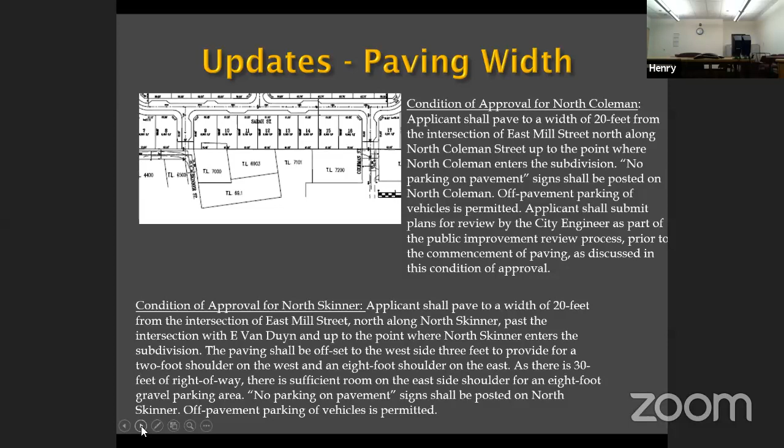I presented two draft conditions of approval addressing this situation that are up for council consideration. Next slide, please.

Bollards. Staff received this update on August 19th in regard to not utilizing North Skinner as a vehicular access point. Appellants have proposed to place bollards on North Skinner, effectively removing vehicular access into the subdivision via North Skinner.

In conversations with the applicant, they would not be opposed to this and would place breakaway bollards on North Skinner where it currently shows North Skinner entering the subdivision. These breakaway bollards can be quickly removed to allow for emergency vehicle access in the event they need to access the subdivision.

This access point would now be only open to bicycle and pedestrians. In this case, the 20-foot paving on North Skinner and North Coleman do not change. They would still be widened to 20 feet, parking on pavement prohibited, but off-pavement parking permitted.

The addition of bollards to North Skinner and moving vehicular traffic onto Coleman will not result in operational or safety issues beyond what is standard for this type of street and intersection, as found in the applicant's supplemental TIA dated August 20th, 2020. If council chooses this option, I have provided a draft condition for consideration. I'd also like to note the fire chief has signed off on this particular situation here. They are fine with the bollards.

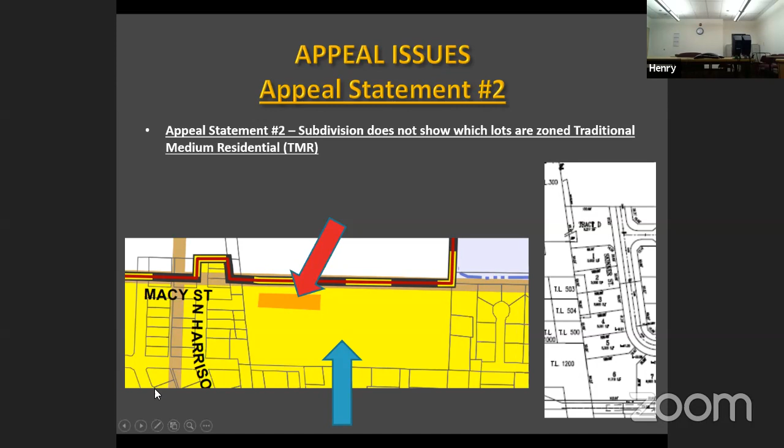Next slide, please, Sammy. Prior to final plat approval, the final plat shall have a plat note indicating which lots are zoned traditional medium residential. Next slide, Sammy.

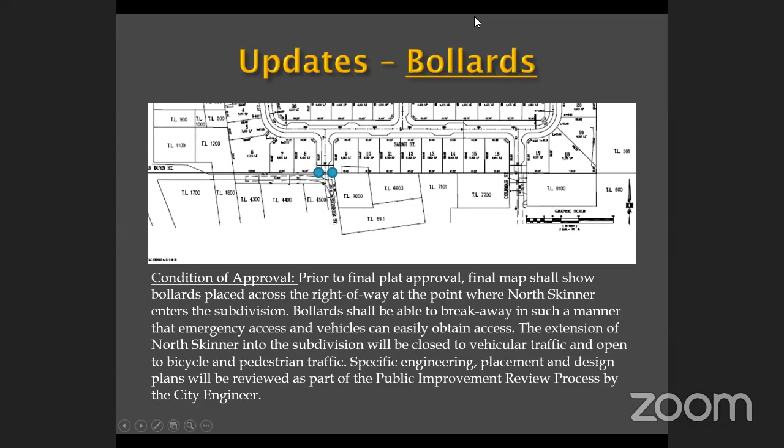Yeah, my limited knowledge - it's like a peg that would be placed in the middle of a bike path, and it would prevent a car from getting on there, but you could easily walk by it or ride your bike by it. If needed in an emergency situation, they could quickly be removed by the fire department. Maybe think of the Eugene Bike Path - there's construction, like little metal posts at the end. Those are bollards to prevent cars from driving on there.

Got it, they're basically steel posts for protection. That's what I was looking for. Bollards also protect things like gas meters. They're commonly used for protecting an area or creating an open barrier.

Councilor Fox: Based on Councilor McConnell's question about only one point of access, I thought East Mackenzie was connecting it. Is that not the case? I'm not aware of any vehicle access via East Mackenzie leading into the subdivision.

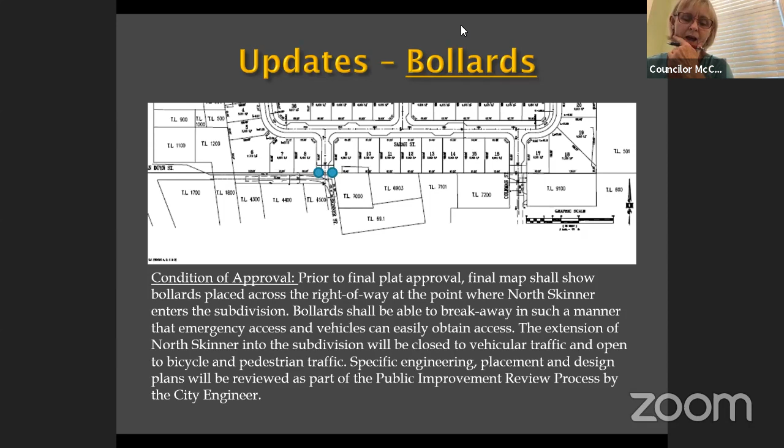Councilor McConnell: I have one more question. The improvement to Van Duyn, what is the purpose of that, given that Van Duyn ends in a property that has been vacated? Can Sammy go to slide 8?

The dedication of Van Duyn has been worked out behind the scenes between the applicant and opponents. It also addresses a requirement for improving land adjacent to the subdivision, which isn't the case for all adjacent streets. But the applicant does own land adjacent to East Van Dyne, so it has the possibility of being improved up to 45 feet of right of way.

But it would not go through to a connector of any sort. That's correct—the improvement of East Van Dyne would still terminate at Skinner and would not go all the way through to the other side of West Van Duyn because there's private property in the way.

Other questions? Councilor Fox: What is the logic for closing off the Mackenzie access, not Mackenzie, for the Skinner access? To limit vehicle traffic on North Skinner and also allow for pedestrian and bike access.

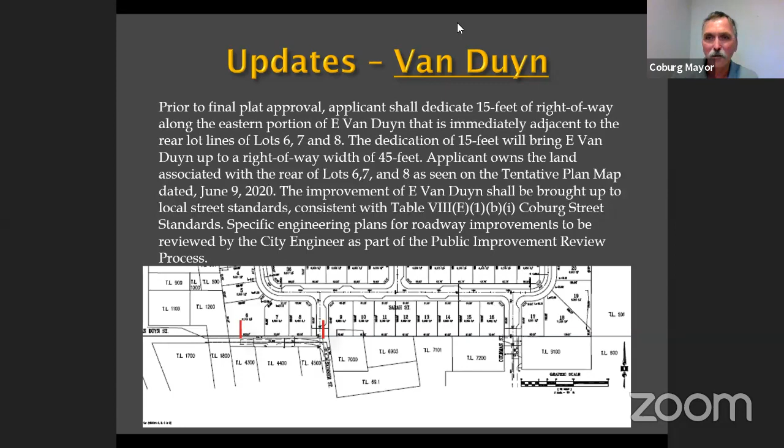Councilor McConnell: Mine isn't a question, but a clarification—one of the concerns from the appellants is traffic coming into the park area from Skinner onto Locust. I think that may be why they addressed that, though I may be wrong. We'll probably gain more clarity as we go with the other testimony.

Any other clarification questions? Councilor Fox, one more: North Coleman—was there any traffic pattern analysis about the amount of traffic that would come and go if there's only one point of access?

Yes, staff asked the applicant this morning to have their traffic engineer submit an amended TIA, and they did. The conclusion of the traffic engineer is that all access going to North Coleman is still efficient and safe and can operate as it's supposed to.

I sent that to Sammy this afternoon—Sammy, you might want to forward it if you haven't already. That was forwarded in their 8:20 packet, and I confirmed both Patty McConnell's written testimonies are included in that email as well, along with the PDF written testimony. I believe the applicant's traffic engineer is on tonight and may be available to answer more specific questions during their presentation.

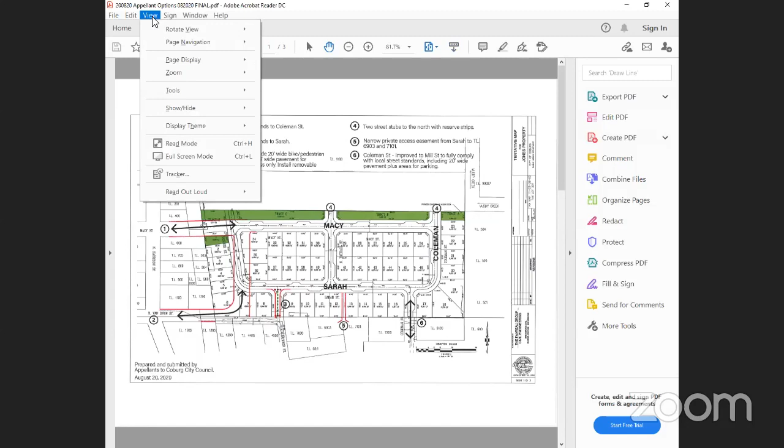Option A, again, this isn't completely vetted. I just want to touch on what we were trying to illustrate. So with option A, Macy Street extends to Coleman. That's in your adopted transportation plan. That occurs before the subdivision is constructed.

Van Duyn extends to Sarah, and we've realigned it in this option so that North Skinner is narrowed. It's not a fully improved public street. It is a bike and pedestrian and emergency access only. With regard to number 4, the number of street stubs going to land outside the urban growth boundary and outside the city limits is 2.

And to account for Van Duyn not going through and the hardship it creates for what are parcels that could achieve greater development, number 5 points to a private access easement. And then for Coleman, the improvements to Mill Street are to fully comply with local street standards, including not only the 20-foot wide pavement, but also areas for parking. So now that's the key themes with this option.

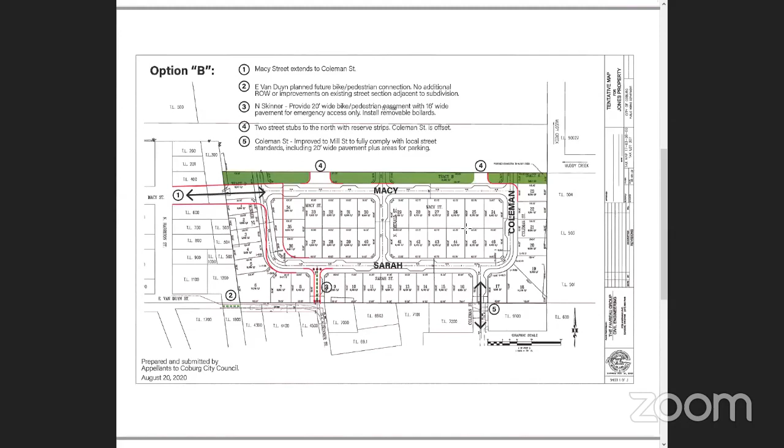Then with option C, this one probably comes the closest to code compliance. The developer is only responsible to extend Macy Street within the boundary of the subdivision, as shown there. East Van Duyn, again, the developer is only responsible adjacent to the tract itself, but that road is widened and fully improved to local street standards, just for lots 6, 7, and 8. Number 3 is the same.

Skinner's is narrowed. It does not have the right-of-way width to be able to be brought up to local street standards. Number 5 we've talked about. Number 6 is where the north-south street is aligned better so that as it goes forward, if the city decides to expand the urban growth boundary in this area, you don't create another triangular situation as it goes north. You have a good distance from North Harrison. And then with this one, Coleman is improved to full street standards.

We've included multiple times the local street standards. It's exhibit D in our latest packet to you. It has the parking area on the local street actually being paved. There's no signage, so as a driver, as a motorist, you'd know that you park wherever there's pavement, and then you have a soft shoulder and a travel lane.

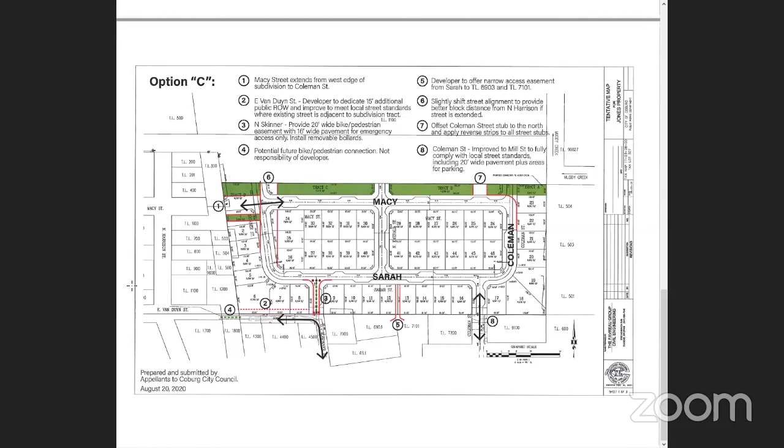8 minutes. Okay, I will say in general, there were a lot of missteps with how this application was reviewed when it came in, and it's unfortunate where we are today. We tried to illustrate alternatives. We're not against housing. We support residential development in the city of Coburg. It's the timing and the access and circulation being provided that are the biggest issues.

Since I have just a couple more minutes, I'll also share that this is the first subdivision to come in under your new code, and it's important that you actually look at the code section and realize you're setting a precedent for future subdividers. If a relatively flat 10-acre site, if a developer can simply state they don't have any land available for parks and recreation, you're allowing them to opt out by paying the fee.

And the fee may sound like a lot until you realize you don't have control over when and how much the lots sell for. Also, in this case, almost all of the tracts that are being deeded to the city will be used for stormwater drainage. So they're really not achieving that end goal.

Well, I will conclude with one more comment, and that is the subdivision did include street profiles for street improvements done within the subdivision. We have not received any street sections for Coleman, the existing street improvements being proposed. So that's just been challenging.

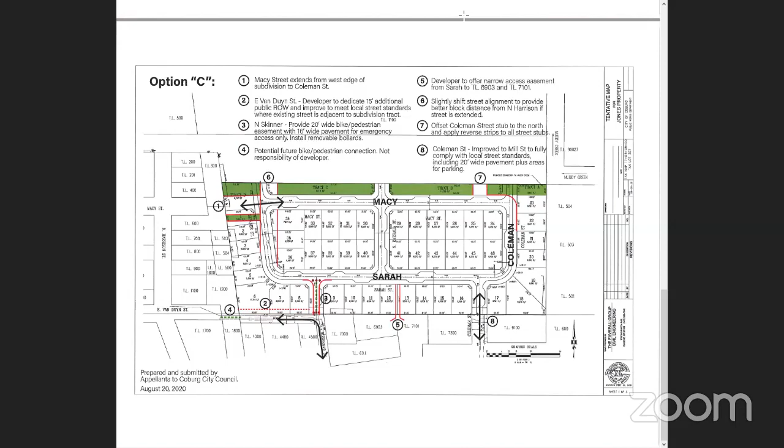That will conclude my comments, and I would like to see if Alan Wells could use our remaining time. And thank you for your consideration.

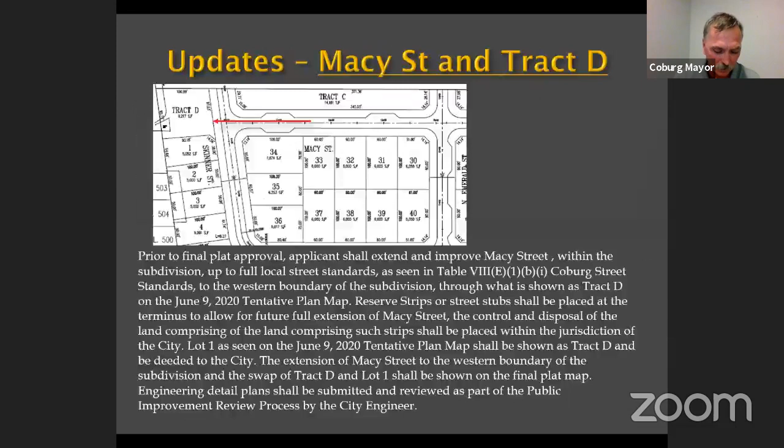Keep in mind, for clarification, that you can only ask clarifying questions, but we do have the applicant's rebuttal next, and they could. They're provided 10 minutes.

Mayor, it's Marcus. Go ahead, Councilor Alexander. Van Duyn, what is that access right there? I know there's a fence right there. Is that someone's property? Yes, between Skinner and... okay.

Well, if you look at the applicant's lot 6, 7, and 8, there is, I guess, 20 feet wide of North Skinner that's already there. And then there's 2 pieces of private property between that piece of Van Duyn and the western portion of Van Duyn.

Any other questions from council before we move to the applicant's rebuttal? I have one more question. Go ahead, Councilor Alexander. North Harrison Street, can that wrap around the end of that block? No, it's outside of the urban growth boundary and city limits, and Lane County would come into play, and that's nothing we really want to get into at this time. Lane County would need to be involved, and to this point, they have not been involved in that discussion.

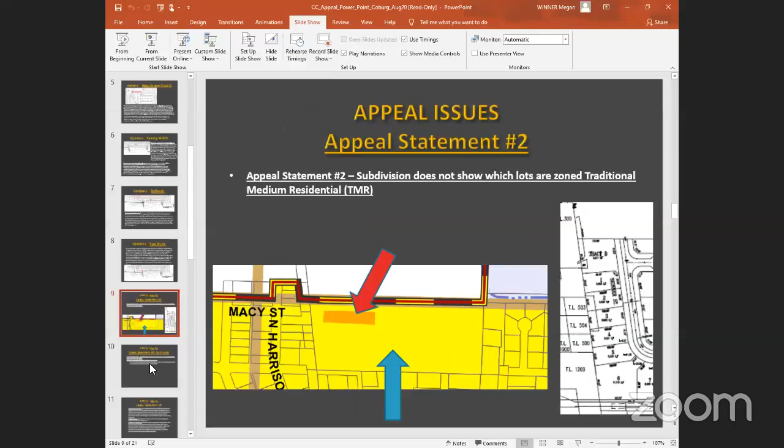It's in the red, near the bottom in the red, number 10. I can't see number 10. Can you move it up just a tad more, Sammy? Sammy, maybe highlight it, because red on black isn't the easiest to read. Yeah, that's okay, that's okay.

Subdivider shall, in addition to setting aside land, pay into a public land acquisition fund a sum of money equal to 1% of the gross sale price of each lot in the subdivision, which sum of money shall be paid at the time each lot is developed or sold, whichever occurs first. Okay, thank you, thank you.

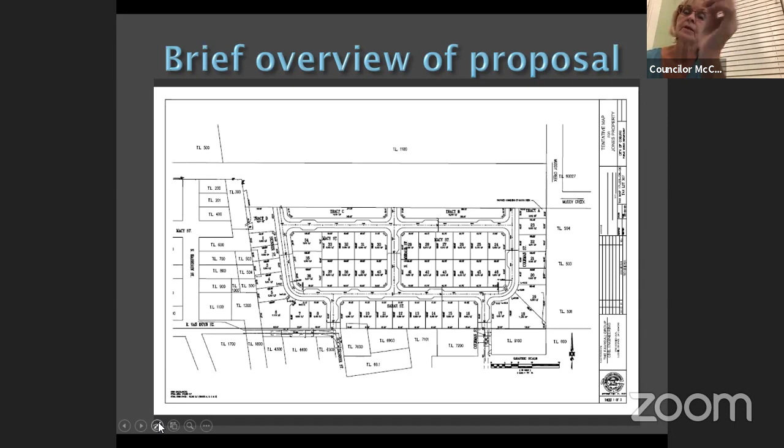I would suspect that we would have just a straight through on Macy Street. And with the potential dedication of 1 and 2 to parks, even if the Macy infringed upon 1, having half of 1 and all of 2 would still provide a substantial open space, I think, that could be used for a park. And would be centrally located for an existing neighborhood and the new neighborhood, it looks to me. But would be next to what would at some point become a very busy street. So there's that.

Any other questions? Yeah, Councilor Blaine. So if we do, say that Macy Street, we set it up that way, in the future we end up getting that access. That creates a real big problem for North Harrison, back into East Locust or Macy out to Willamette, basically. I know that's down the road, but that seems like we're just kind of moving the problem a couple streets away.

Just a thought. Well, this is Councilor Bell. In all honesty, from what I've heard and read and reread, I think that a lot of the appellant's concerns relate to not in my backyard, not wanting to see it, and I don't say that that's wrong. But I also know that as we've heard this, we heard as we were developing Hatfield, we heard a lot of concerns about how terrible it was going to be on the already failing intersection, what the impact was going to be on Water and Bruce. I think we heard it as we developed Coburg Crossing. I think there was tremendous concern about what that was going to do to those neighborhoods and those small streets. I don't know that that's come to fruition. And I think change is really hard, and I think we all acknowledge that, but it's how do we manage that?

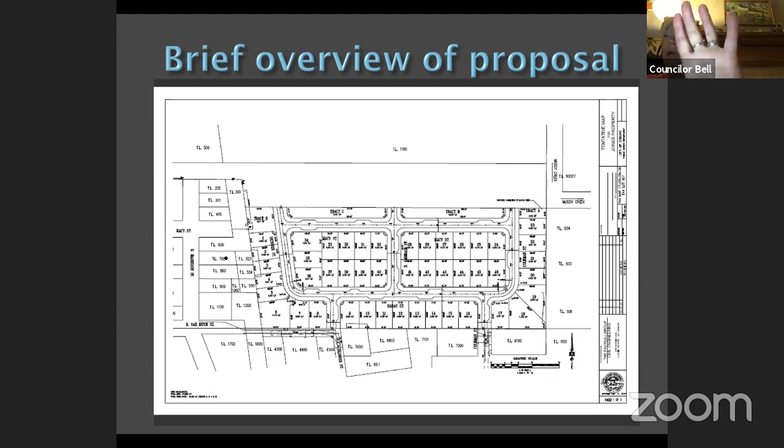I also wonder if there is a way that we could somehow, and I don't know this, but somehow loop this into our Coburg loop paths, because our loop path comes right off of Sarah. I mean, that's not that far, and I don't know what that would take. I think what we're struggling with is a lot of these streets and why they didn't punch through initially. This was all old railroad right of way.

And that's what we're struggling with at this point. Well, so I don't know. Okay, go ahead. There's further, because when you look at the planning, and I know Councilor McConnell's been on the planning commission too, but a lot of the stuff that we've put in where we want to continue the grid pattern and have these through streets, those are because of lessons learned before. That Van Duyn, where it's only 20 feet wide, is a classic. And I believe it was on Skinner Street that there was only a 20-foot right of way to the south that we had to correct in developments.

Yeah, and I believe, again, lessons learned, and we can't let that lesson go by on this one. I think we need to really push for maintaining that grid. It needs to be set up so that we show the future that, yes, that Van Duyn should be going through and Macy should be going through. To rely on the count of 6 access points in this neighborhood, with 3 of them being to the north, waiting for the UGB to expand and develop there, that's years down the road, up to 20 years or more, I believe. After we went through the UGB trying to get that area into our UGB and it was remanded back to us, I think we all have to accept those accesses to the north or egresses are a long ways down the road. I believe that setting up Van Duyn and Macy are real important, and we should be looking to set that infrastructure up. And at the appropriate time, which will never be the appropriate time, but at some hard moment, we're going to have to decide to take that private property and make those streets come through for the growth of our city.

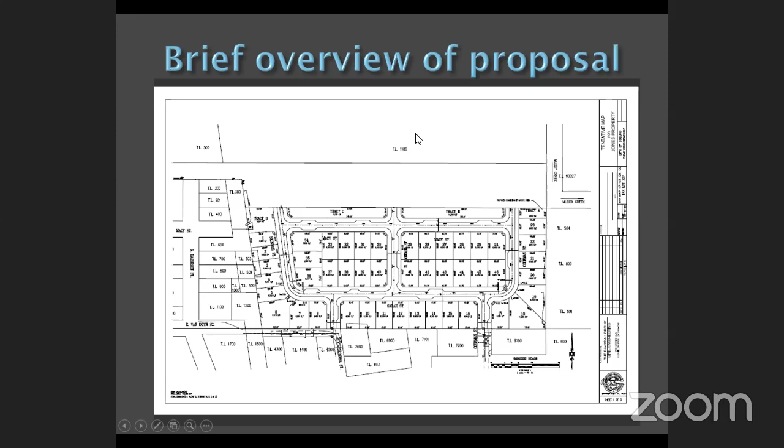And while we're pulling it up, I would agree with Councilor McConnell. Ultimately, the bollard addresses that, but then you get this development with only one egress access, which I think is ridiculous.

And I mean, imagine a car breaks down right there, and then something happens and people need to leave. I mean, you can always come up with an answer to that, but there should be at least 2, if not 3. I mean, you think Hayden Homes has 1, 2, 3.

And even the new one on the north side of town has 2. There's a north one and one on the east side of town, I guess east-west.

Well, and I certainly agree with that, only having 1 egress. Now, there is the potential to remove the bollards and open up Skinner Street, but that, such in an emergency, it just creates other issues for me.

And we've had that issue before Hatfield Estates was created, because if there was an accident on Van Duyn just to the east of the fire station, there was no way to get to anything east of them. And it's the same kind of situation here.

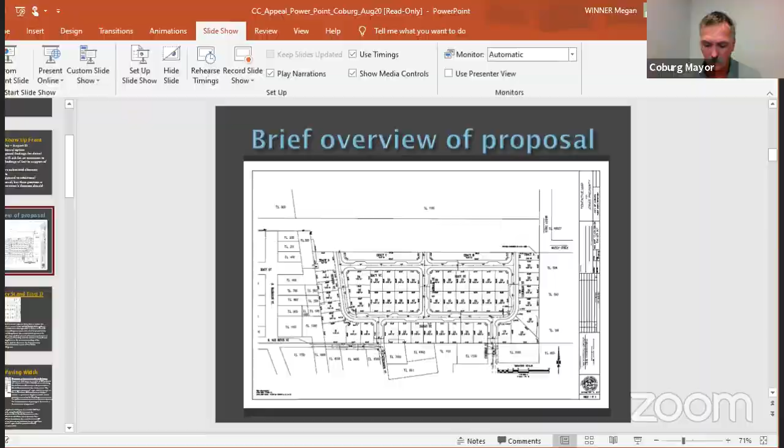Right, and if the bollards aren't used and Skinner is still an access point, more than half the traffic will choose that route. Maybe. And that will be bad. Unless they're going to I-5 or something.

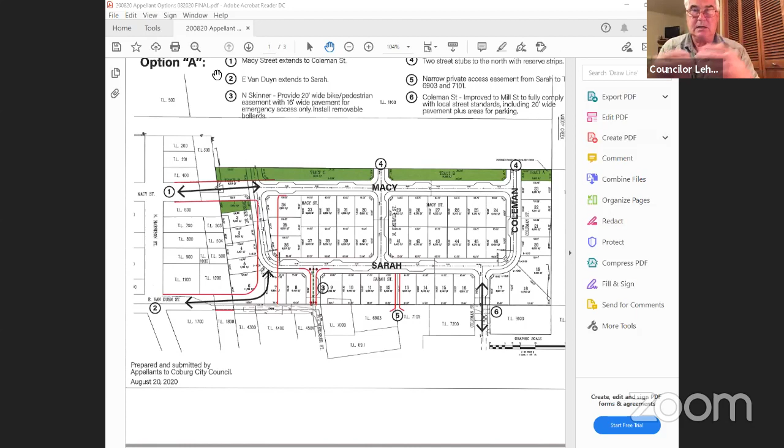Councilor Lehman: Well, it seems that we have some agreement between the appellants and the applicant in terms of some modifications to the final order that the planning commission had, that would be a compromise acceptable to both parties. But we also have Teresa Bischow asserting that she feels the proposal should be rejected for violations of code and the comprehensive plan. So I'm a little confused on how we're proceeding with this.

On one hand, I'm thinking that I like the idea of the bollards and the bike ped option, because it seems to satisfy both what some of the appellants are complaining about, as well as what the applicant is willing to do. And it does take the traffic away from the park, which is a safety concern for many.

So I come back to making a proposal of a motion, from which I want the other council members to say what they can add to or subtract from to move this forward. So with that, I would say that I'm considering making a motion to approve the planning commission final order on the Wycott subdivision proposal with revised provisions presented, including the bollards and the bike ped option, and the 20-foot paved width on Coleman, and the reserve strips, and the 10-foot wide planting strip easements, and the change to lots 1 and 2 being designated as park space, with the 1% fee also being applied. So if that were a motion, what would the other counselors like to see added or subtracted from that?

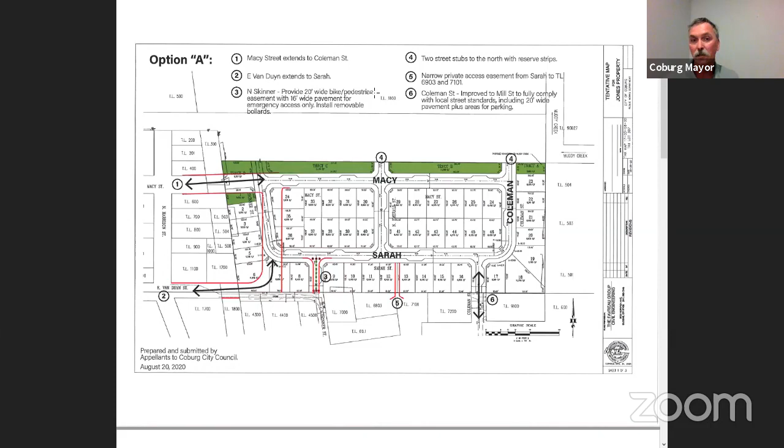So the development on McKenzie, or on Skinner, to widen that and put more paving in - I think that exacerbates safety issues. It doesn't fix them in my mind.

I would disagree with you on Skinner. You've got to improve Skinner to have any kind of safety there, because even the way it is now - and I walk around that area all the time - cars buzz through there. You've got to improve Skinner, whether it's improved to the actual street standards or not, I don't know.

But as I look at Skinner, and look to the north on Skinner, I see cars parked everywhere. The one property owner down there must have at least 10 vehicles, and they're parked on his lawn and everywhere. That isn't going to change - well, it'll have to change, I guess, if we open up Skinner into a development.

But I would love to see some sidewalks walking up Mackenzie up to Willamette. That's really dangerous with Chiefs on one side and the new Coburg Inn on the other. Cars pull out of there all the time and pay no attention.

I want to clarify that I was talking strictly about residential. Around the parks and the commercial area, it's a whole different matter with sidewalks.

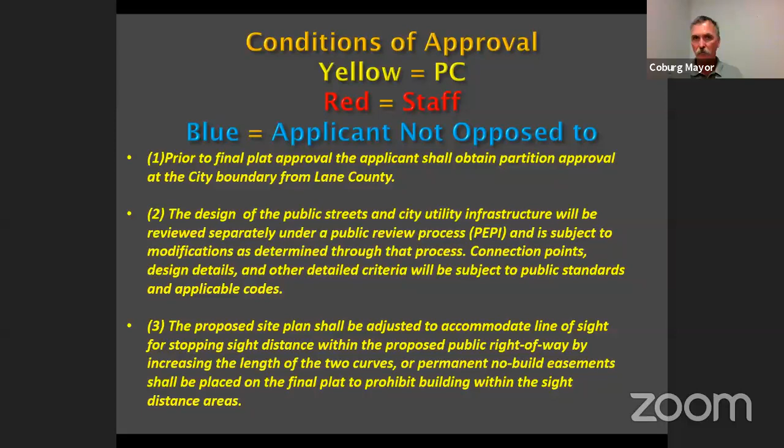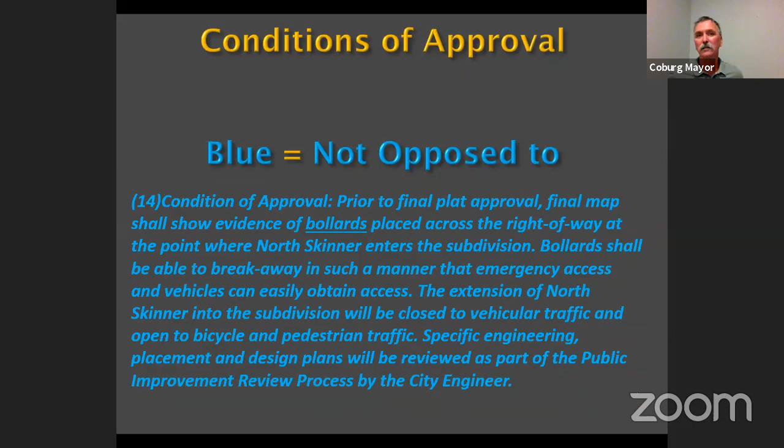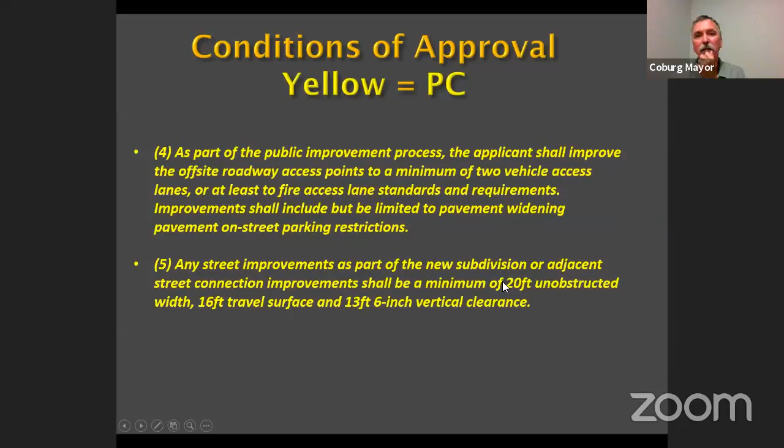I'm referring to the yellow, red, and blue - the three different colors that were listed when Henry was giving the presentation. I think that might give us some points to actually discuss and determine where we're going. These are the conditions of approval - we have the planning commission's in yellow, what Henry is recommending for staff is in red, and the blue are those proposals not opposed by the applicant. Quite a few of them. So I'm trying to figure out the best way to approach this without going through all of them - is there one we can pick that may guide us on where we're going from here, because it seems to be the traffic issue?

This is Henry, I'll chime in - all the traffic-related conditions are essentially blue, because those have been the things that have come in as of late.

Is there something in the counselors' minds that, if it doesn't get fixed, we're done? Is there something you want to discuss that if we can't fix, we're done?

Macy Street is not ours to do anything with. Yes, part of it is, but to go through to the new development, there's nothing there. I agree with that, but in the future, if the north end and the comprehensive plan does state that we should be considering it for the future - so Macy Street, yes, it doesn't affect anything now, but I think we have to provide for that future element of connecting Macy Street. So yes, I agree with you, it doesn't help the transportation issue now.

And I don't think we need to beat that one anymore, but I think the right of way should be set up so we can acquire that private property and hook that up - same thing with Van Duyn. That's the only way I look at those - they do not help us at all with the current transportation questions we're asking. I agree, they have nothing to do with helping that situation right now.

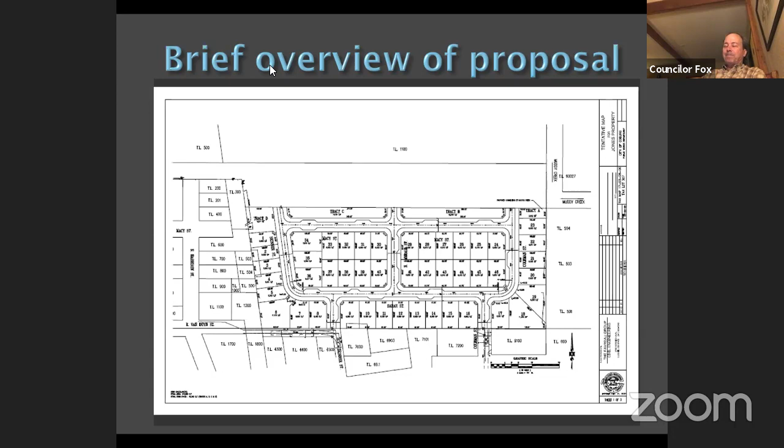Oh God, is there any way that we're going to approve this as presented? No. No. I'm a no. And again, I like it, I'm sure they make great homes and stuff, it's just the in and out.

And because of the Hayden Home development, there's no park over there, and that would have benefited from a rumpus area. So every new development, unless it's an individual house, should have that in mind - a green space, a usable green space.

Well, I heard three no's. This concerns me, I just don't think this is well thought out. I agree, that's the hard part - where I think the development, I'm in favor of the development.

It's just a transportation issue, that ingress/egress, even with Coleman and Skinner on it, I'm having a tough time. But then to put bollards in and push it all over to Coleman, I can't go there, because it will turn Coleman into a highway.

And I know that because I'm on the other end of Coleman, on the south end of town, and Coleman is a highway for everybody from the south end of town. It is also a shortcut for people trying to avoid the street light - they come down Coleman, zip across to the pizza joint and zip out, just like they do around the park. And people are already using it to get to the Hayden Homes to the east. Yeah, they're already using Coleman to get there.